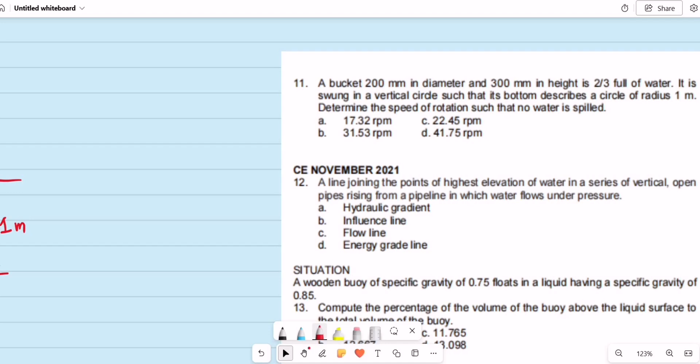Okay, tuloy natin sa number 11. So sabi dito, a bucket 200 millimeter in diameter and 300 millimeters in height is 2/3 full of water. It is swung in a vertical circle such that its bottom describes a circle of radius 1 meter. Determine the speed of rotation such that no water is spilled.

So parang ito yung figure natin. Itatali natin yung bucket, then i-rotate natin siya on a vertical circle. Ang tanong is, ano yung rotation? Basically, that is the angular velocity para walang matapon na tubig.

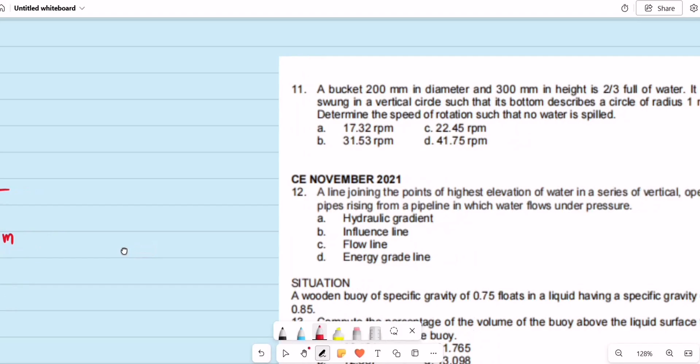Pero take note, nakalagay sa problem na yung laman niya is only 2/3 full of water. So kung i-compute na natin yon, 2/3 of 300 is, ang laman lang niya na tubig ay 200 millimeters, or basically equal to 0.2 meter.

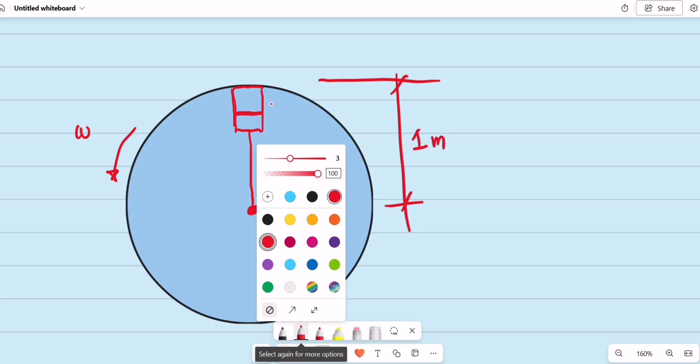So yung radius outside, yung circle na form natin, is 1 meter. Yung laman niya na tubig is only at 200 mm, or basically again that is 0.2 meter.

So parang ganito pala yung appearance nung tubig kapag yung ating bucket ay nasa ibabaw ng ating vertical circle. So ano ba yung mga forces na i-consider natin dito? Kumbaga sa point na to, yung highest point ng ating vertical circle, dito yung parang may pinakamataas na chance na may matatapon na tubig. Ano yung mga forces involved is obviously yung weight ng liquid.

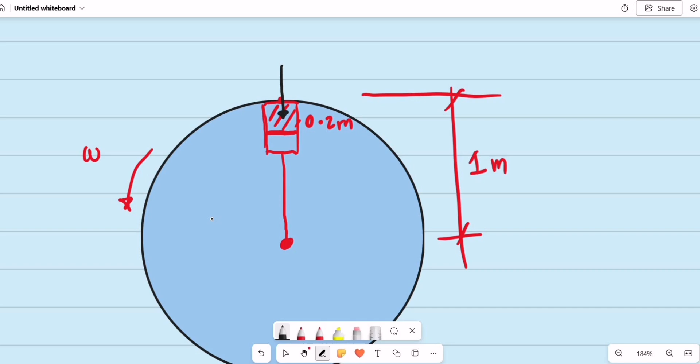At ano yung kukontra doon para hindi siya matapon? Basically, circular motion, pipigilan siya ng centrifugal force. Pero again, we have the water is only 0.2, outside radius natin is 1 meter. Pero dapat yung centroid ng tubig yung i-consider natin to form that circle.

So saan siya dapat? Dapat somewhere dito sa gitna. So basically, magbabawas tayo. Ayan, from 1 meter, from 0.2, bawasan natin ng kalahati. So ang kalahati niya is 0.1 meter. So nandun yung centroid ng tubig.

So ano yung distance na ngayon from the centroid of the water papunta dito sa center ng ating circular motion? What is 1 minus 0.1? Ang i-consider natin na radius hanggang sa centroid ng tubig is 0.90 meter. Basically, again, yun yung 1 meter minus kalahati ng height ng tubig. So we have 0.90 meter.

Ayan, balik tayo sa konting mechanics. Paanong walang tubig ang matatapon? Summation of forces vertical equal to 0. This is upward forces to be positive. So ano yung upward? We have centrifugal force equal to the weight. Yun yung pipigilan niya, yung pagbagsak ng tubig out of the bucket.

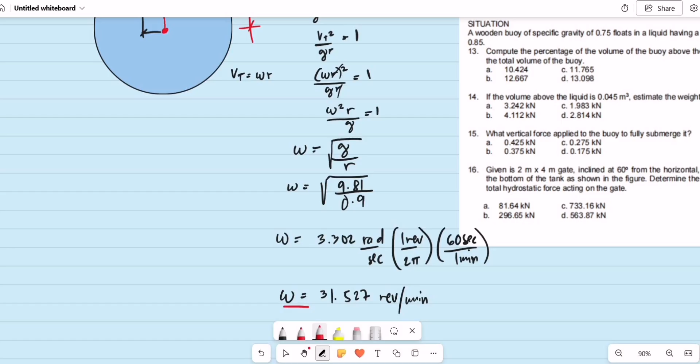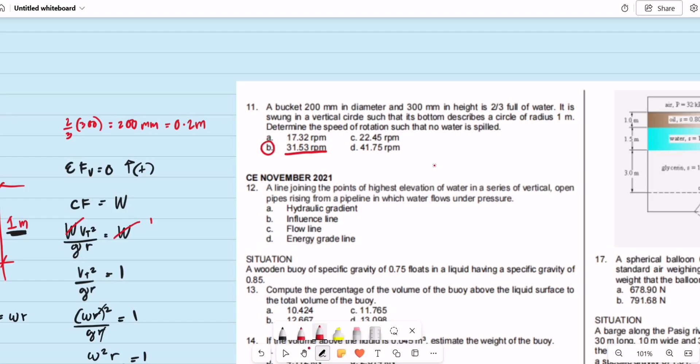So tingnan natin if we have this one sa choices for item number 11. Okay, yun ka C, letter B. We have that as 31.53 revolutions per minute or the RPM.

Okay, next, diretso natin ito sa number 12 since nakaano lang naman siya. Definition of terms. Sabi dito, number 12: a line joining the points of the highest elevation of water in a series of vertical open pipes rising from a pipeline in which water flows under pressure.

So naalala ko lang ito dun sa laboratory experiment sa hydraulics. Meron tayong mga pipe, then meron tayong mga vertical pipes, dito sa horizontal pipe natin.

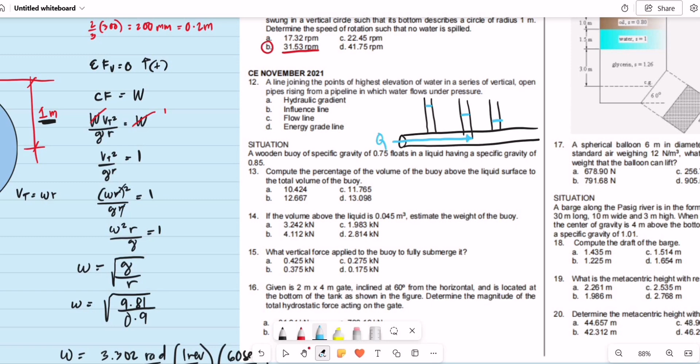At i-allow natin yung fluid flow, pressurize, so tumataas yung mga liquid surface natin sa mga vertical pipes natin. I hope na nagawa natin ito before sa hydraulics lab. Pwede nating i-connect yung top of each liquid surface sa mga vertical pipes, so ang tawag natin dito or sa line na to is the hydraulic grade line, okay, or that is the same as the hydraulic gradient. So letter A tayo for item number 12. Yun yung solution natin for item number 11 and 12.

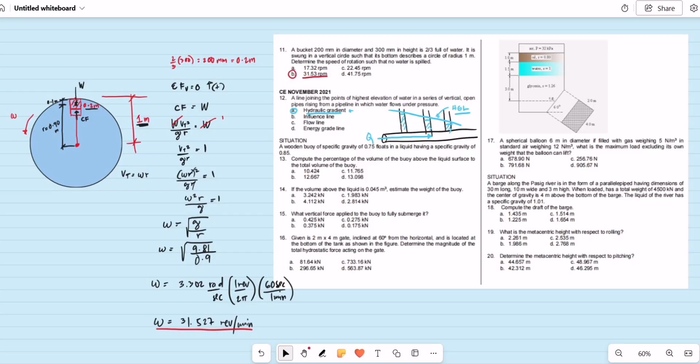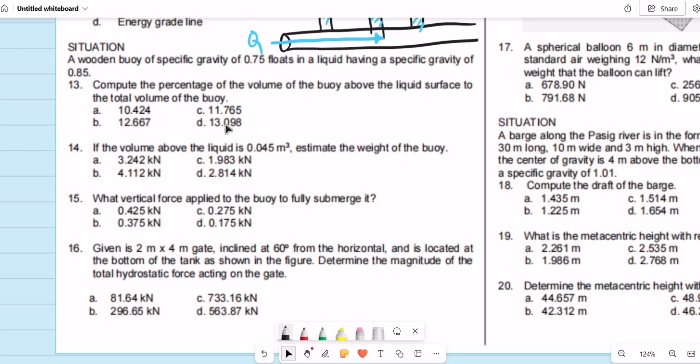Okay, so we continue to item number 13 to 15. Sabi dito, a wooden buoy of specific gravity of 0.75 in a liquid having a specific gravity of 0.85. Question number 13, compute the percentage of the volume of the buoy above the liquid surface to the total volume of the buoy. So parang ito yung ating figure: the object has specific gravity 0.75, specific gravity of the liquid is 0.85.

Kapag nakalimutan lang natin yung basic nito, start with mechanics. Meron tayong weight of the object. Since yung specific gravity ng object ay less than sa specific gravity ng liquid, obviously it will float. Ito yung case number 1 natin ng regular review, so yung weight ay kayang-kayang buhatin ng buoyant force. Paano natin kinukuha yung weight? Weight is simply the gamma of the object times the volume. Buoyant force naman is the gamma liquid times the volume submerged, since partially submerged lang siya.

So we do mechanics, summation of forces vertical equal to 0, upward forces to be positive. Dalawang forces lang naman yan, so yung ating buoyant force is simply equal to the weight of the object. Then we substitute yung mga equivalents.

Buoyant force is simply unit weight of the liquid times the volume submerged, equal sa weight ng object na gamma of the object multiplied by the volume of the object. Kapag i-substitute natin, specific gravity of the liquid times unit weight of water times volume submerged equals specific gravity ng object times gamma water times volume of the object. So ano yung pwede nating i-cancel dito? Yung gamma water.

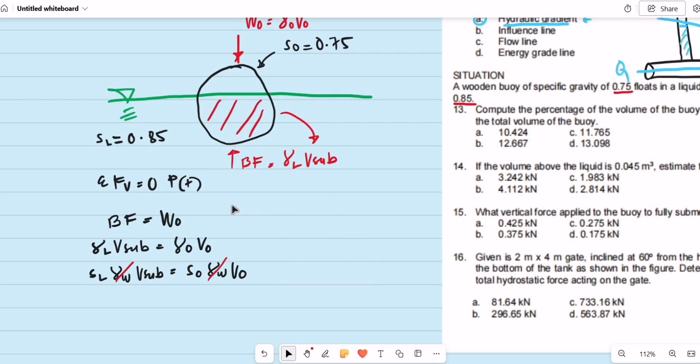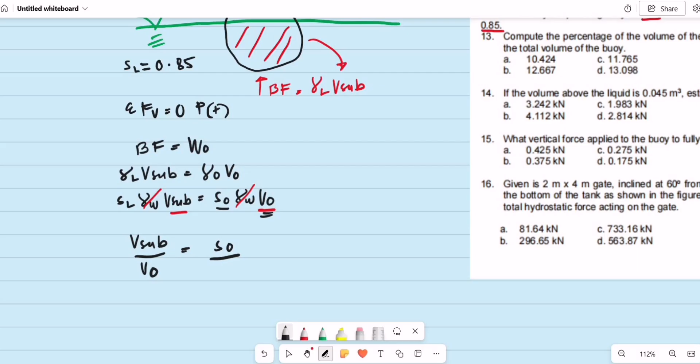Kaya lang sa number 13 kasi hindi ito yung required. Pero kung gusto nating directly makuha yung ratio ng volume submerged to the volume of the object, simply yan yung ratio of the specific gravities. So we have volume submerged divided by V sub O is simply equal to S sub O, specific gravity ng object, divided by the specific gravity of the liquid. Pero paano naman yung required sa number 13? Kasi ang hinahanap ay the volume above the liquid surface.

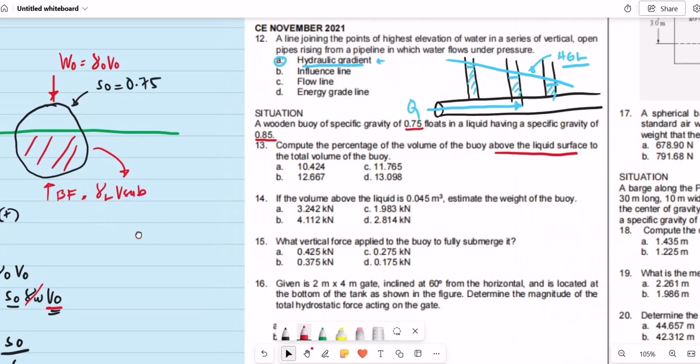So below the liquid surface, we have the volume submerged, at ilagay natin itong volume above the liquid ay the volume unsubmerged. Paano natin kukunin yun? Balikan lang natin yung basic when it comes to the volume of a floating body: yung volume na hindi nakalubog plus yung volume na nakalubog is simply the total volume of the object.

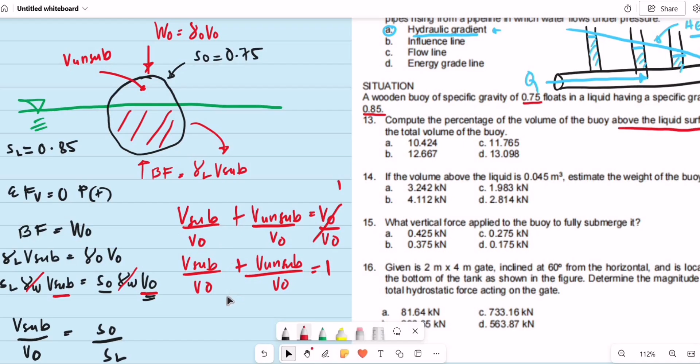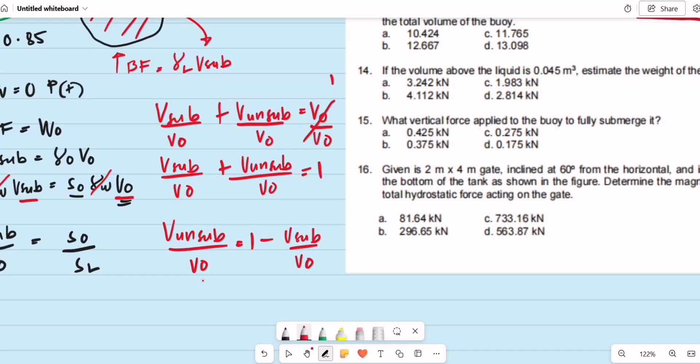Ang ginawa lang dito, since fraction or percentage yung hinahanap, divide all terms by the volume of the object. So alam natin this will simply be 1: volume submerged divided by volume of object plus volume unsubmerged divided by volume of object is simply equal to 1. Kung i-transpose natin yan, we have the volume unsubmerged divided by the volume of the object is simply equal to 1 minus volume submerged divided by the volume of the object.

Pero di ba meron na tayong equivalent when it comes to specific gravities? So we have the volume unsubmerged to the volume of the object is simply equal to 1 minus the specific gravity of the object divided by the specific gravity of the liquid. Pwedeng yun na lang yung gamitin natin sa item number 13. So we have volume unsubmerged divided by volume of the object equals 1 minus SO over SL. Ano yung SO natin? 0.75 divided by specific gravity ng liquid na 0.85. So this should be equal to 1 minus 0.75 divided by 0.85.

Times 100 na lang. I think yung nasa choices ay nasa percent. So pag 3 decimal places, we have that as 11.765%. So ito yung ratio ng volume unsubmerged to the total volume of the object.

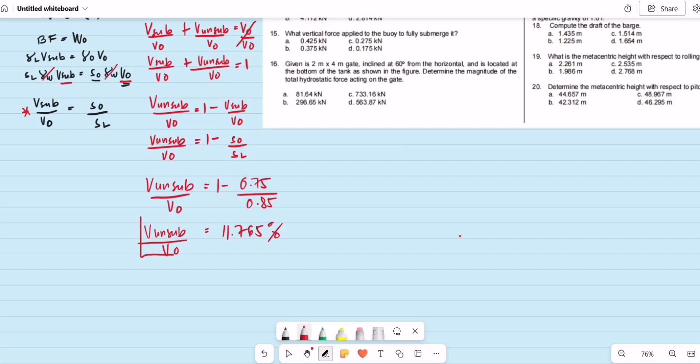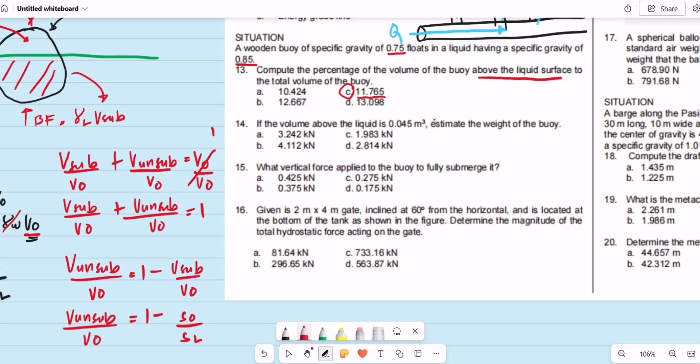So check natin for item number 13. Okay, so that will be letter C. Pwede nyo i-memorize na lang yung equivalence nito. Kung gusto ninyo, V sub over V O is simply SO over SL. Yung nasa ibabaw ng liquid, V unsub over V O is simply 1 minus SO over SL, kung ang gagamitin lang natin ay mga specific gravity.

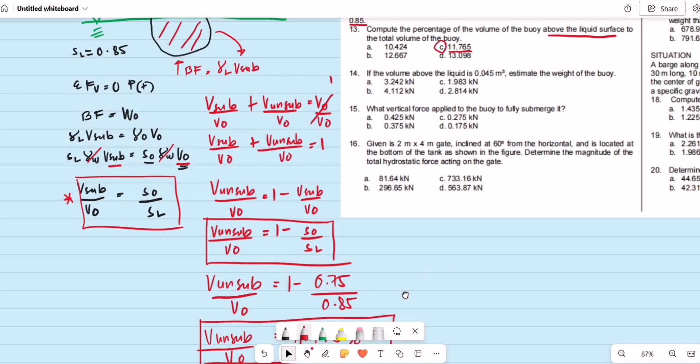Follow-up question number 14: If the volume above the liquid is 0.045 cubic meter, estimate the weight of the buoy. So, volume above the liquid. Dito tayo sa number 14. Volume above the liquid is a volume unsubmerged, which is equal to 0.045 cubic meter. Okay, yun yung given sa number 14.

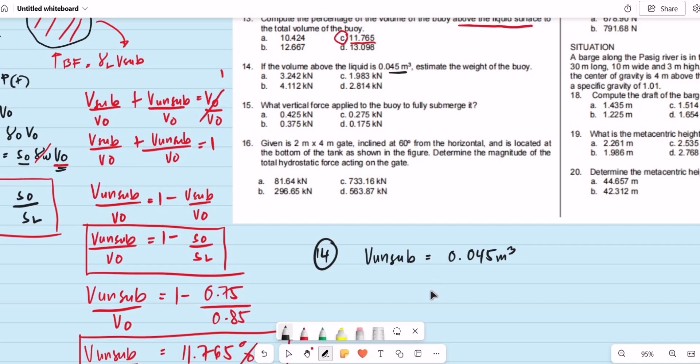Pero, di ba meron tayong percentage? Yung kaka-compute lang natin sa item number 13. So, we have that as volume unsubmerged to the total volume of the object is equal to in percent or in decimal, divided by 100, 0.11765, or again yun yung 11.765%. So we can have the volume of the object.

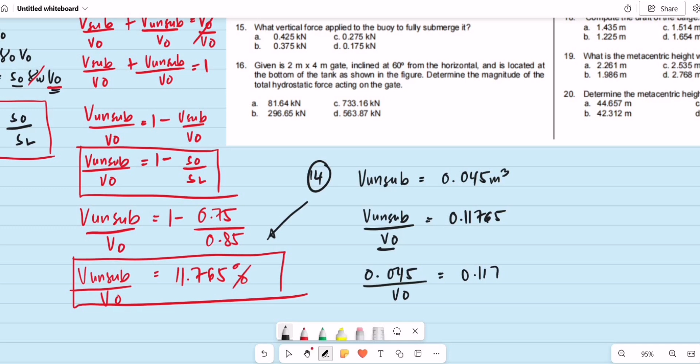Volume unsub is 0.045, divided by the volume of the object is equal to 0.11765. So compute natin yung volume ng object. So the volume of the object should be equal to 0.045 divided by 0.11765.

Okay, total volume na ito class ng object. So gawin nating 4 decimal siguro. 0.3825. Tama ba? Kung ganun yung rounding natin, 0.3825. Okay, so pwede yan. This is now the total volume of the object, in terms of cubic meter.

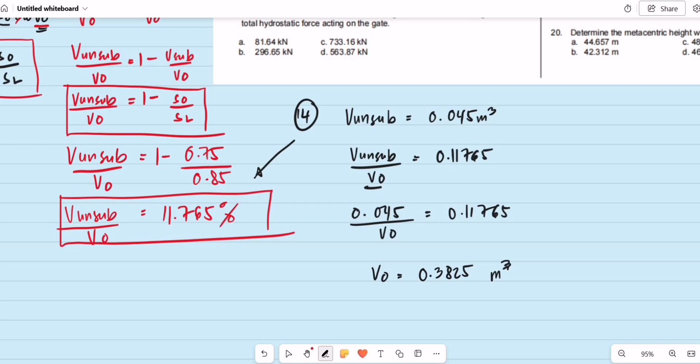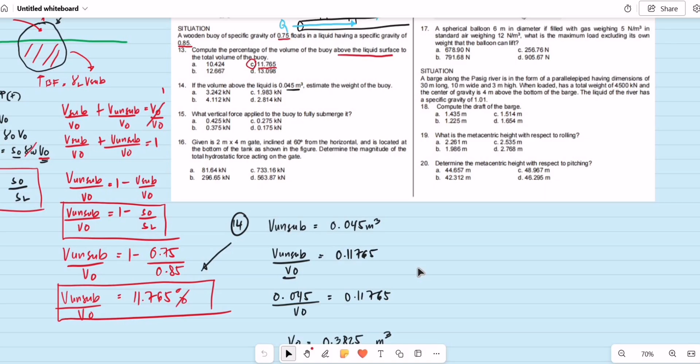Okay, so ngayon meron na tayong volume ng object. Paano natin hahanapin yung weight of the buoy? Di ba kanina, meron tayong equation. We have the weight of the object is simply gamma times volume. So, the weight of the object is equal to gamma ng object; specific gravity niya is 0.75 times gamma water, 9.81.

At yung na-compute natin na volume, we have the 0.3825 cubic meter. So, ito yung record sa item number 14, the weight of the object. Pwede natin i-direct yung stored value times 0.75 times the 9.81. Equal to? We have 2.814 kilonewtons.

2.814, okay, kilonewtons. So check natin if we have this one sa choices. Okay, meron? Yeah, so we have that as letter D, 2.814 kilonewtons. And then lastly, item number 15: What vertical force applied to the buoy to fully submerge it.

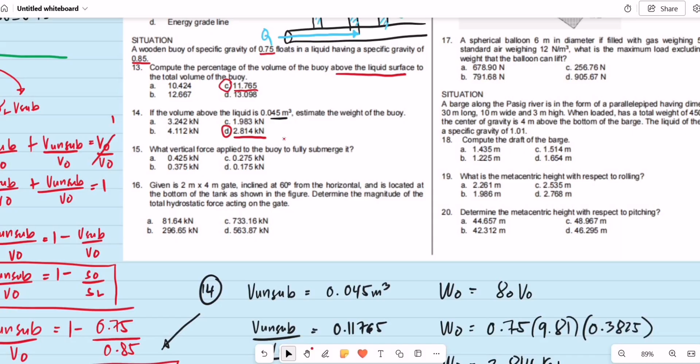So, ano yung additional force? Diba, obviously, it is just partially submerged. Kailangan nating magdagdag ng additional force para lumubog siya. Pero ano lang ba yung portion na hindi nakalubog? Given yun sa item number 14 kanina. So sa item number 14, that volume above the liquid surface is 0.045 cubic meter. So yun lang siguro yung kailangan nating kunan ng equivalent doon sa buoyant force.

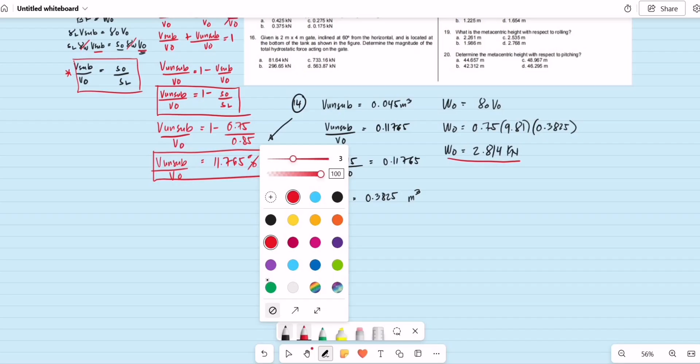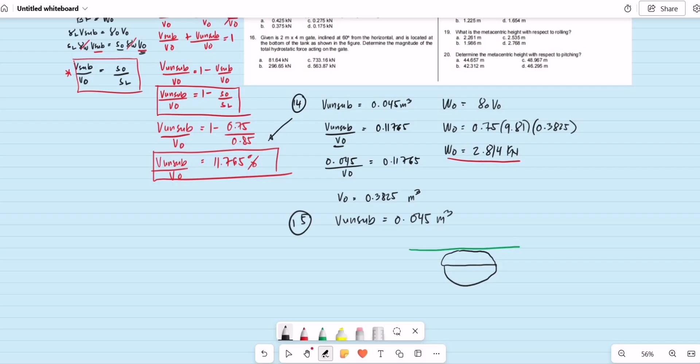So pwede yung ganun na shortcut. Dun sa item number 15, meron tayong given kanina na volume unsubmerged is equal to 0.045 cubic meter. Kindly imagine lang, 'di ba, yun lang yung additional portion ng object na ilulubog natin. Sabihin natin, ito yung portion na yon. Initially, ito lang yung volume submerged.

Again, initially kanina, ito yung volume unsubmerged equal to 0.045 cubic meter. So, yan lang yung dadagdagan natin ng equivalent buoyant force, na equivalent nung idadagdag natin na additional force. So, that is simply equal to the gamma liquid times the volume unsubmerged. So, try natin yung method na to.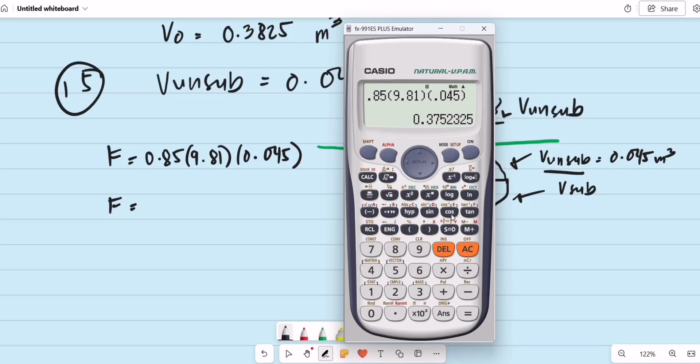Kasi again, yung additional force, ang equivalent niya is the gamma liquid times yung ilulubog mo, which is the volume unsubmerged. So, that additional force should be equal to gamma liquid, 0.85 times the 9.81, multiplied by 0.045 cubic meter. So this magnitude should be equal to, ayan, so we have 0.85 multiplied by the 9.81, multiplied by 0.045. So we have 0.375 kilonewton.

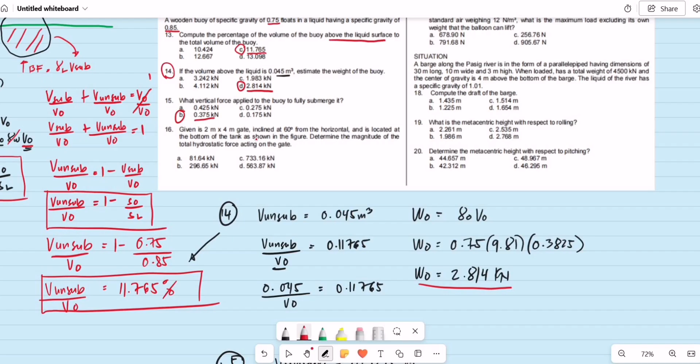0.375, okay, kilonewton. So check natin if we have this one sa choices, item number 15. Okay, so that will be letter B tayo, 0.375 kilonewtons. So ito yung solution natin for item 13 to 15.

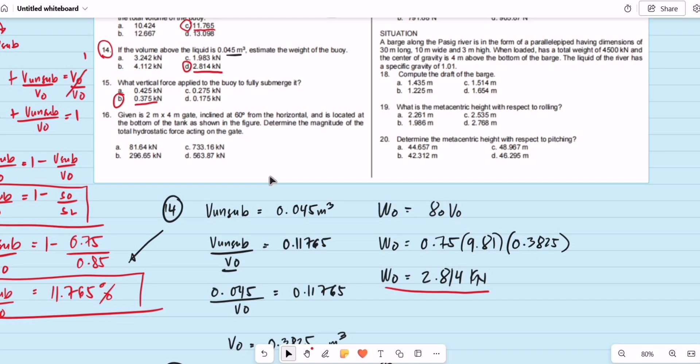Okay, so proceed na tayo ngayon sa item number 16. So sabi dito, given is a 2 meters by 4 meters gate inclined at 60 degrees from the horizontal and is located at the bottom of the tank as shown in the figure. Determine the magnitude of the total hydrostatic force acting on the gate. So ito yung figure natin.

We have ayun, 3 layers of liquid or liquids. So meron tayong oil, we have water, and then glycerin. So sa ibabaw niya, pressurized pa ng hangin, that is 32 kilopascals. So tinatanong lang yung total hydrostatic force acting on this inclined gate. Again, so that should be on the center of pressure.

So kapag naka-incline siya, class, how do we compute for the hydrostatic force? We can have it as gamma h bar times the area. Kaya lang, wala tayong equivalent ng h bar kapag yung surface is naka-incline, at the same time kapag multiple layers of liquid naman. Usually ginagamit lang natin ito kapag isang liquid lang, at dapat yung liquid surface niya is zero pressure. Kung multiple layers tayo, ang ginagawa natin, ang force is equal to pressure up to the center of gravity multiplied by the area. Kung napakaraming pressure, summation of pressures lang natin hanggang center of gravity, then multiplied by the area, that will be the total hydrostatic force.

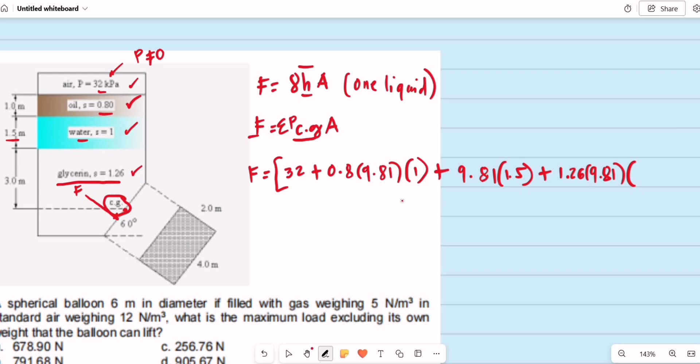Last layer tayo, we have the glycerin. Specific gravity is 1.26 times 9.81. Ang kailangan lang natin is yung location ng center of gravity. Nakabigay naman siya exactly 3 meters galing dun sa interface with water. So that should be the height of the glycerin hanggang center of gravity lang, 3 meters.

Ayan, summation of all pressures hanggang center of gravity - 32, yung oil, yung tubig, and then glycerin. Kapag nandun na tayo sa center of gravity, i-multiply na natin yon sa area ng gate. The area of the gate is 2 meters by 4 meters. This will be the total hydrostatic force, or the total force acting on the gate.

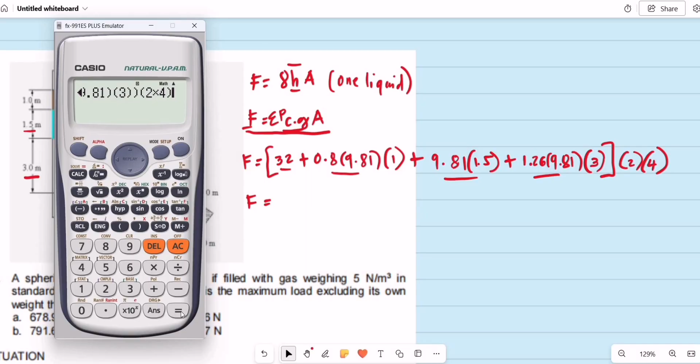So if you are to solve for that one, we have 32 plus 0.8 of the 9.81, 1 meter lang yan. Plus tubig, that is 9.81, height ng tubig is 1.5. Plus glycerin, specific gravity 1.26 times 9.81, height ng glycerin hanggang center of gravity is 3. Multiplied by the area, we have that as 2 by 4, equal to 733.158 kilonewtons. So let's say 733.158 kilonewtons.

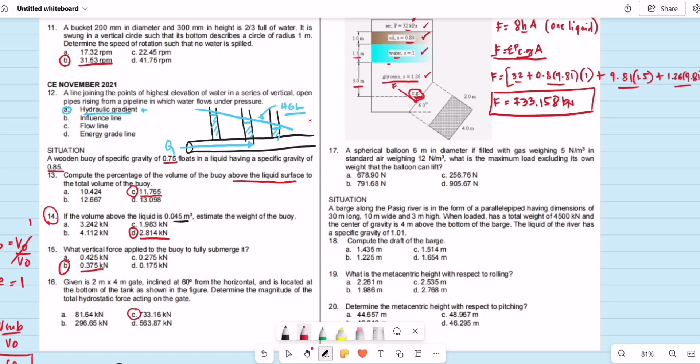And so check, 733.158. So check natin yan sa choices. Okay, therefore for item number 16, we have that as 733.16. So that will be letter C tayo dun.

Okay, proceed tayo sa item number 17. So sabi dito, a spherical balloon of 6 meters in diameter filled with gas weighing 5 newtons per cubic meter in standard air weighing 12 newtons per cubic meter. What is the maximum load excluding its own weight that the balloon can lift?

So let's say ito yung balloon natin, meron siyang laman na gas. Ang unit weight ng gas sa loob ng balloon is equal to 5 newtons per cubic meter. Tapos yung air outside the balloon, gamma air natin is equal to 12 newtons per cubic meter. So syempre, mas magaan yung hangin sa loob, so most likely lilipad dapat itong balloon. So ano yung additional weight daw? Sabihin natin W na pwedeng buhatin ng balloon. Para siyang buoyancy pero hangin yung usapan.

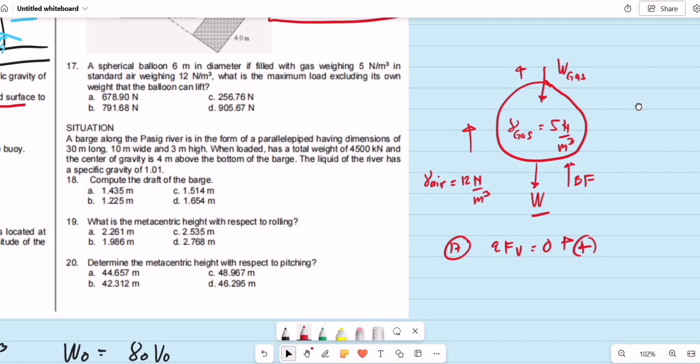So summation forces vertical, 'di ba? Meron tayong buoyant force and then yung additional weight, at isama lang natin syempre yung weight ng gas. So number 17, main equation natin, summation of forces vertical equal to 0, upward forces to be positive. Ano yung upward force? Yun yung buoyant force because of the air, minus yung weight ng gas na nasa loob, minus yung additional weight na bubuhatin ng balloon, equal to 0.

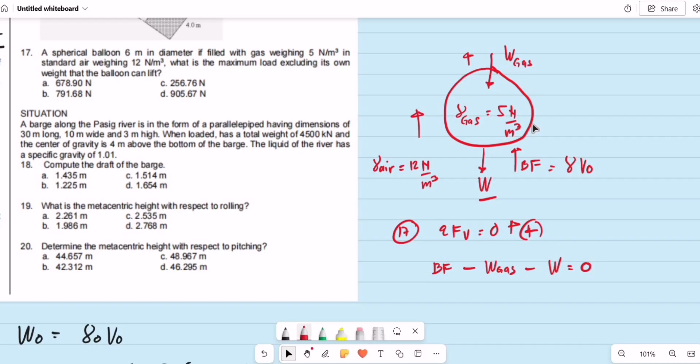Ang equivalent natin dito is para siyang gamma times the volume. I-assume natin na ayun nga yung buong balloon is napalibutan ng hangin. So paano natin i-compute yung weight ng gas? Weight ng gas is basically gamma times the volume. Meron naman tayong gamma ng gas. Yung volume is yung sphere natin, meron tayong diameter na 6 meters, so ang radius ng sphere na to should be 3 meters. Yung volume ng sphere is basically 4 pi divided by 3, radius raised to 3.

And we substitute. So buoyant force natin is gamma of air times the volume. Gamma of air is 12 newtons times volume, 4 pi divided by 3, radius ng sphere is 3 cube, minus yung weight ng gas. Ano yung gamma ng gas? We have 5 newtons per cubic meter. Pareho na lang yun sa volume ng sphere, we have that as 4 pi divided by 3, radius 3 raised to 3, minus the additional load W equal to 0. So what should be left? The value of the W.

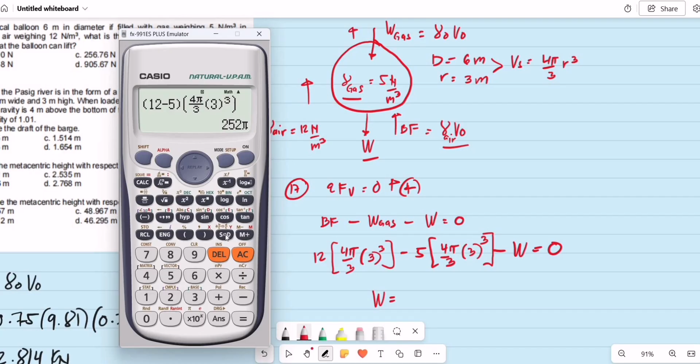Ayan, so pwede natin i-factor out yan. 12 minus 5, multiplied by 4 of shift pi divided by 3. So the radius is 3 cube. So this should be equal to 252 of pi or 791.681.

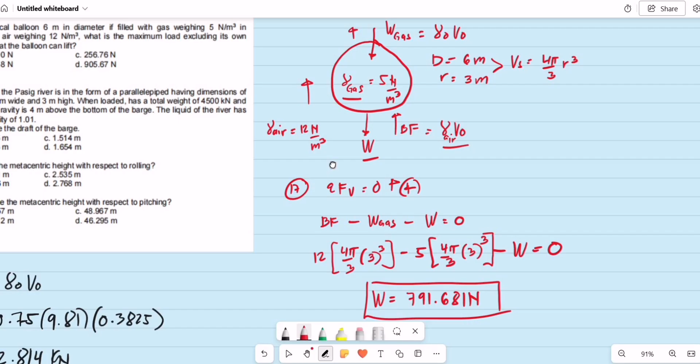791.681 newtons, since lahat naman ng units natin dito nasa newtons. So do we have this one sa choices? Okay, item number 17 is letter B tayo doon, 791.68.

Okay, so before the next problem, intro muna tayo dito sa topic na to.

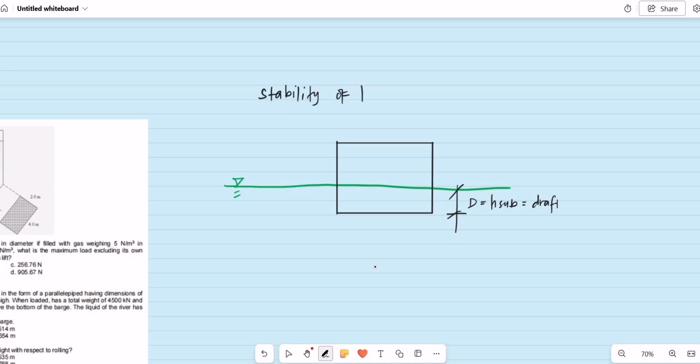Okay, so the next topic is the stability of floating bodies. So pag may nilagay tayo na object sa liquid, for the case ng mga floating bodies, hindi naman talaga sila upright na nakatayo while floating. So paano ba natin didesign na pag naglagay tayo ng object like for example yung bangka or yung barko, pag nilagay natin sa dagat is upright yung kanyang position while floating. Ang concept na pagdidesign nun is the stability of floating bodies.

We need to familiarize some of the points when it comes to this analysis. We have yung point M. Let's say this is point M. So M is simply, sabihin natin M is simply the metacenter.

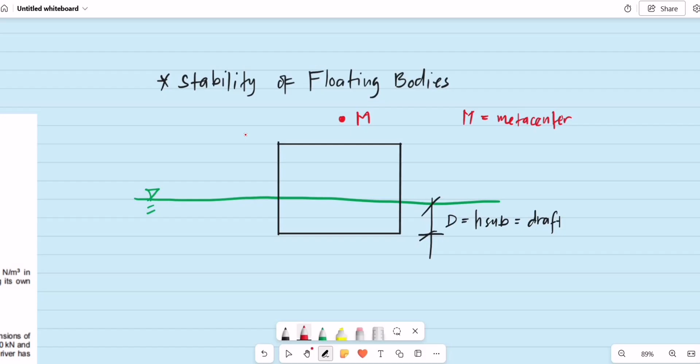M is the metacenter. Then kailangan din nating i-locate yung center of gravity ng object. So ang ginagamit the usual is capital G, this is the center of gravity. Then meron tayong submerged height, yun yung H sub.

Pero ang madalas na ginagamit dito is D, which means draft. So basically yun yung height na nakalubog. Doon sa height na nakalubog is meron tayong tinatawag na center of buoyancy. Ito yung B sub O. So we have B sub O, this is the center of buoyancy. Yan, so that is the center of buoyancy, the B sub O.

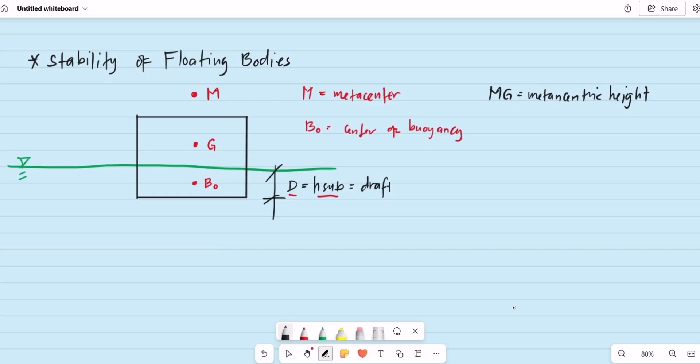So ano yung mga kailangang i-compute dito? When it comes to the stability of floating bodies, ang isa sa mga kino-compute dito is the MG. So MG is basically the metacentric height. Yan, so metacentric height, MG. Kung titingnan lang natin sa ating floating body yung mga points na yon, MG is simply the distance from the metacenter to the center of gravity.

So how do we compute that? Ayan, meron tayong distance pa na kailangang i-consider. Ito yung B sub O. Again, kung babalikan natin, from metacenter to the center of gravity is MG. We have that as G. From the metacenter papuntang center of buoyancy, ano naman yung distance na to? That is simply MB sub O, yun lang naman siya. We have the MB sub O.

So meron tayong formula how to determine yung value ng MB sub O. MB sub O can be computed as, pag rectangular, applicable lang muna ito sa mga rectangular sections. So the equivalent of MB sub O is the b squared divided by 12 times d. So by the way, ano yung b? Ito yung width ng section na kino-consider natin, let's say that is b. So b squared divided by 12d multiplied by 1 plus this is the tangent squared of theta divided by 2.

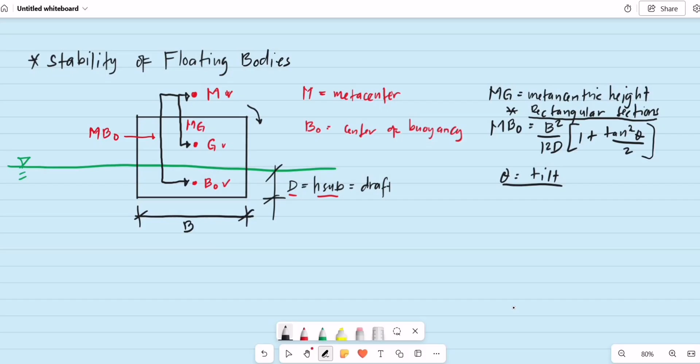So based sa figure natin, balik tayo dito sa figure. Paano natin i-compute yung MG? So the usual, we have the distance MG, this is the metacentric height, is simply the MB sub O, from metacenter to the center of buoyancy, minus may kailangan lang tayong ibawas na distance. Ano yung distance na yun? Ito yung distance from the center of gravity to the center of buoyancy. So from the letter itself, this is G, B sub O, anong ibig sabihin nun? Center of gravity to the center of buoyancy. So we have that as minus the GB sub O. So parang i-observe lang natin, MB sub O minus the GB sub O is MG. So parang ito lang yung ating reference dito sa ating figure.

So pag nagkaroon tayo ng positive na value ng MG, ibig sabihin yung ating floating body, kapag positive yung nakuha natin na MG, ibig sabihin yung floating body is stable. And yun nga, kung nagkaroon naman tayo ng negative na MG, ang ibig sabihin lang nun, the floating body is simply unstable. So bakit meron tayong stable and unstable?

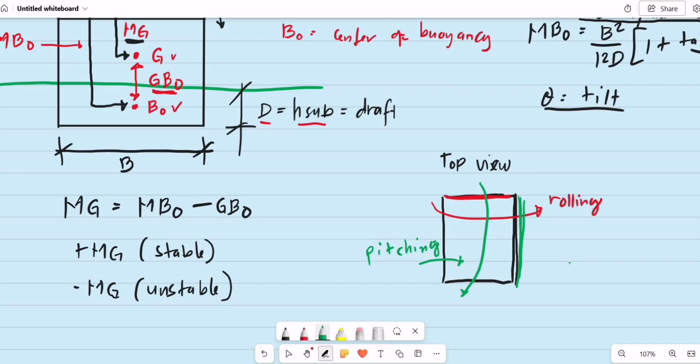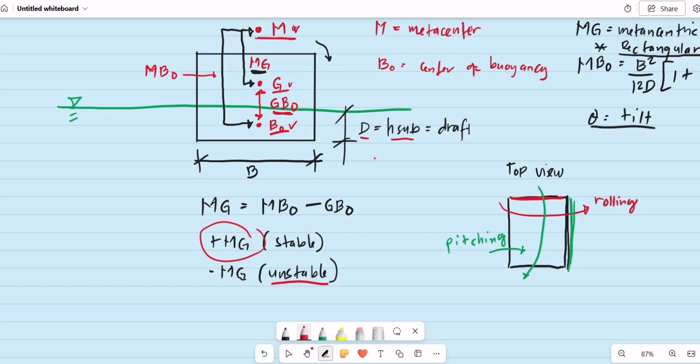Just in case lang na baka ang itanong is definition of term. So in most cases, para maging positive yung value ng metacentric height, in most cases dapat nasa taas ang metacenter. Just in case na yung metacenter is somewhere between yung center of gravity or the center of buoyancy, mataas yung chance na it will be unstable. So dapat yung metacenter nasa taas.

Alright, so let us solve item number 18 to 20. A barge along Pasig River is in the form of a parallelepiped having dimensions of 30 meters long, 10 meters wide, and 3 meters high. When loaded, the total weight is 4,500 kilonewtons and the center of gravity is 4 meters above the bottom of the barge. The liquid of the river has a specific gravity of 1.01.

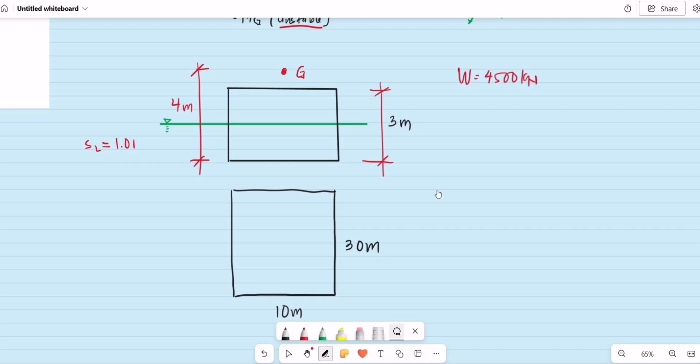So question number 18 is compute the draft of the barge. So parang ito yung figure natin. Siguro medyo nakapagtataka na yung center of gravity is above 3 meters. So sabi naman niya, the barge is loaded, so possible yun yung reason kaya lumipat ng kaunti yung center of gravity.

Ayun. So yung question number 18 is tinatanong yung draft. Yung draft kanina, ito yung D. Pero yun nga, D yung common na ginagamit na term. But basically, that is the height submerged. So ang gagamitin lang natin dito is buoyancy.

So di ba sa buoyancy, okay, we have the weight of the object. Isang buoyant force, bubuhatin siya ng buoyant force. Okay, for question number 18, we do summation of forces vertical equal to 0, upward forces to be positive. So since floating object siya, the magnitude of the buoyant force is simply the weight of the object.

So that is simply, buoyant force natin is the gamma liquid times volume submerged, equal to the weight of the object na given, we have 4,500 kilonewtons. Ay gamma liquid, so take note, ang given na specific gravity, we have that as 1.01. Gamma liquid, 9.81. Then, volume submerged.

Ano yung volume submerged natin? Take note, di ba, pag top view, yan. So, the dimension is 10 meters wide, 30 meters long. So, that is 10 by 30. And then, yung depth na nakalubog is to a height, D sub.

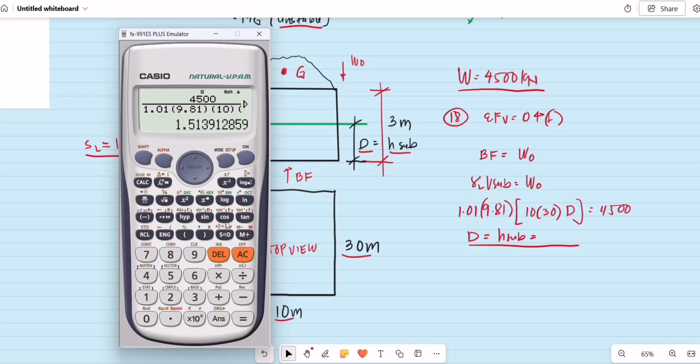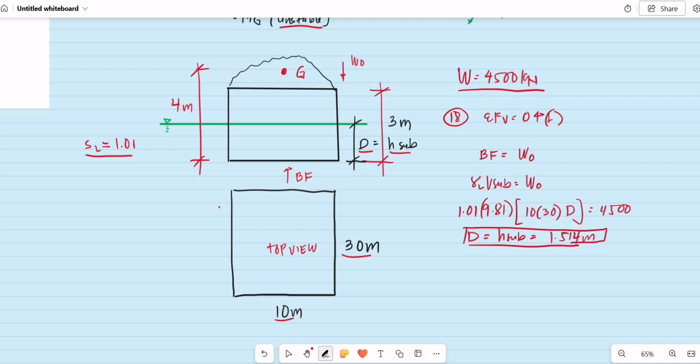Okay, so compute natin, that will be 4,500 divided by 1.01 multiplied by 9.81, times 10 times 30. So we have the draft is equal to 1.5139, gawin natin 1.514 meters. So that will be the draft or the height submerged of the barge.

So kung babalikan natin, item number 18, excuse, that will be letter C, 1.514 meters. So buoyancy lang yung ginamit natin dito.

Question number 19 is, what is the metacentric height with respect to rolling? So ano ulit yung rolling kanina? Kapag yung tilting or movement ng ating barge or ng floating object ay parallel sa shorter dimension, ito yung rolling. So kapag rolling ang usapan, i-consider natin yung parallel dimension natin.

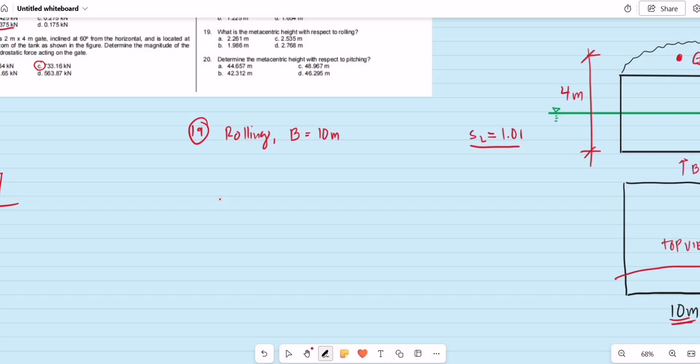Ayan, so this is item number 19. Di ba, ang usapan dito is the rolling. Ang gagamitin natin na value of B is yung weaker axis, that should be 10 meters. Okay? So, wala siyang nabanggit about tilting. Di ba? Walang sinabi sa problem na nag-tilt na yung ating barge. Kapag wala pang given, we can just assume that the theta is simply 0 degree.

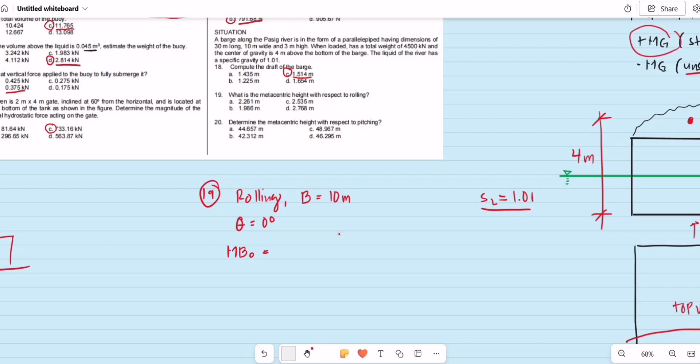So, we can compute first yung isa sa mga distances, MB sub O. Ano ulit yung MB sub O natin? I-assume muna natin for this example na yung ating metacenter ay nasa itaas ng center of gravity. And somewhere dito, yung ating center of buoyancy, that is the B sub O. So, ano yung MB sub O? Formula natin kanina.

This is B squared divided by 12 times the draft, multiplied by 1 plus tangent squared of theta divided by 2. But take note, our tilting is 0. There's no given rotation, and tangent of 0 is simply 0. So since this is 0, what remains is B squared over 12D times 1, which is simply B squared divided by 12 times the draft. Okay, that's it when it comes to 0 tilting.

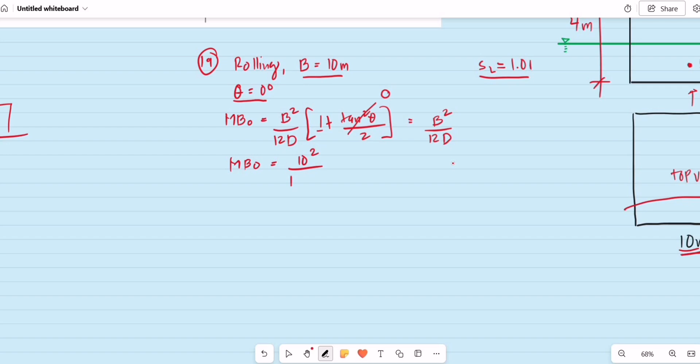Let's compute now the distance from the metacenter to the center of buoyancy. For rolling, our B is 10, the weaker axis. So that's 10 squared divided by 12 times the draft. What was our draft again? The draft is 1.514. So that is 10 squared divided by 12 times 1.514 meters, which equals 5.504 meters.

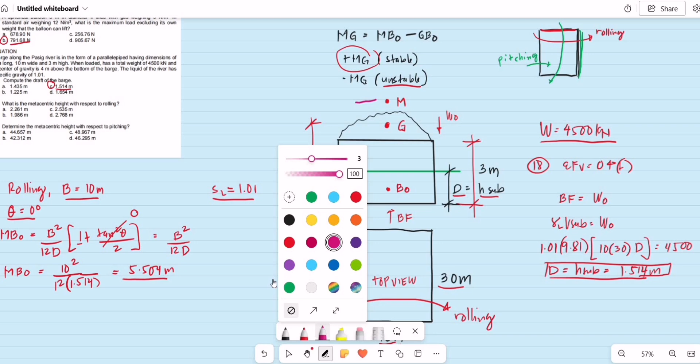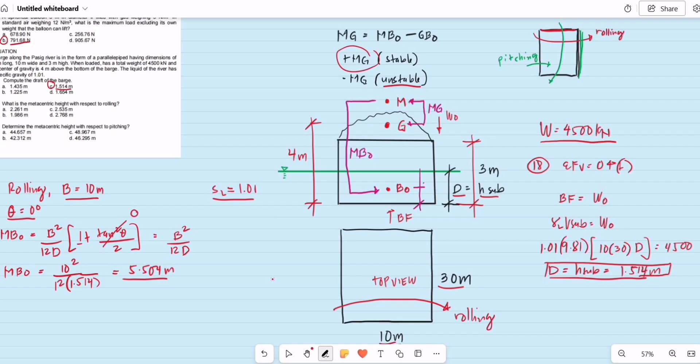Okay, that is the metacentric height or the metacenter, going to the center of buoyancy, which we call MB sub O. So how do we know MG? Again, MG is from the metacenter simply going to the center of gravity. This is our metacentric height, MG. Now for B sub O, it should be at the middle of the draft. So the center of buoyancy is at mid-height of the submerged height. This is the draft divided by 2. So based on our figure, can we now determine the distance from the center of gravity to the center of buoyancy? This is our GB sub O.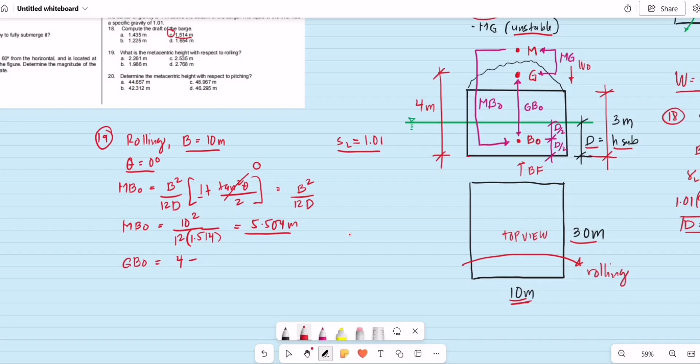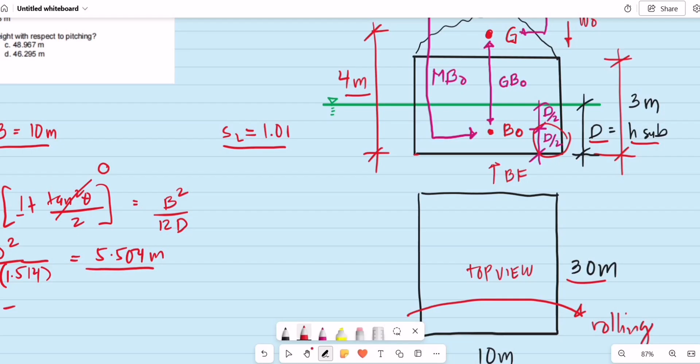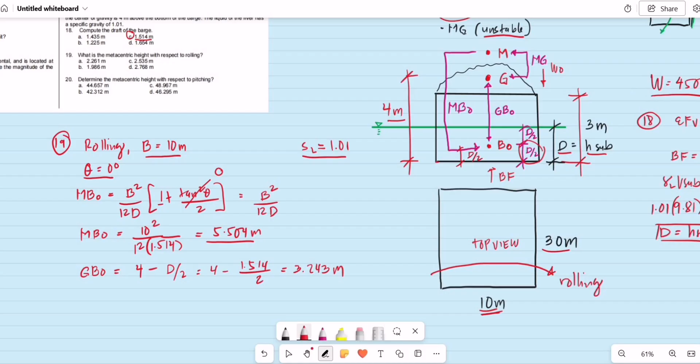Based on the figure, how do we determine GB sub O? Okay, our GB sub O is equal to, according to the problem, from the bottom of the barge going to the center of gravity, we have 4 meters. Minus, let's subtract the D over 2, the draft divided by 2. So that's 4 meters minus 1.514 divided by 2, which equals 3.243 meters. So again, from our figure, that is MB sub O minus GB sub O, which is simply MG.

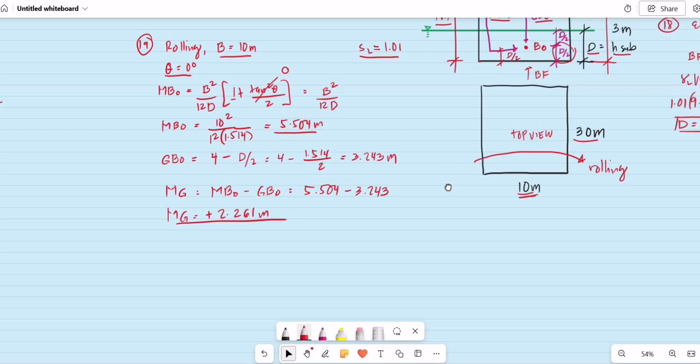So let's compute the metacentric height with respect to rolling. MG is equal to MB sub O minus GB sub O. Our MB sub O is 5.504 meters minus GB sub O which is 3.243 meters. So 5.504 minus that value is 2.261. It's positive, so MG is equal to 2.261 meters. Again, if the value we got is positive, it means it's stable, it is not prone to rolling. Let's check the choices for number 19, 2.261. Okay, so that is letter A.

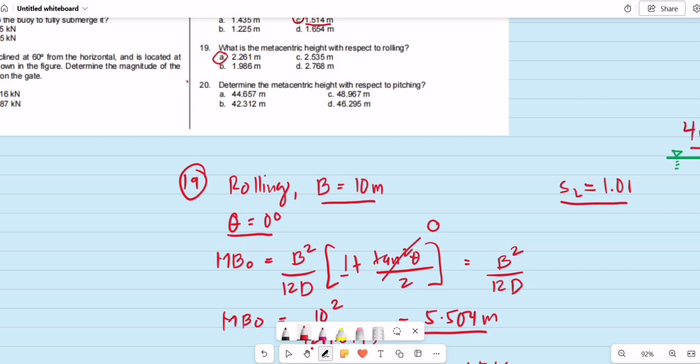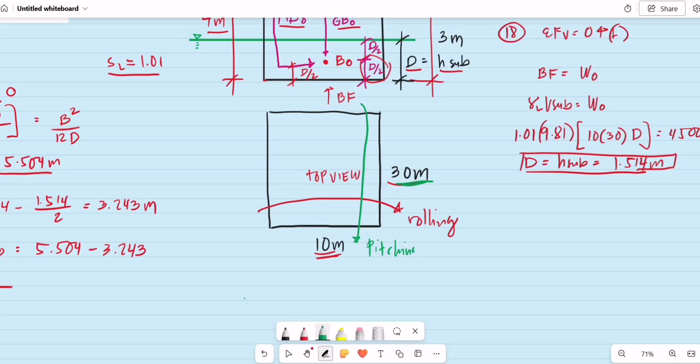2.261 meters. Okay, lastly, number 20, determine the metacentric height with respect to pitching. So when it comes to pitching, the tilting of our object is parallel to our longer axis. So this is the pitching. The question asks for the metacentric height, that's our number 20.

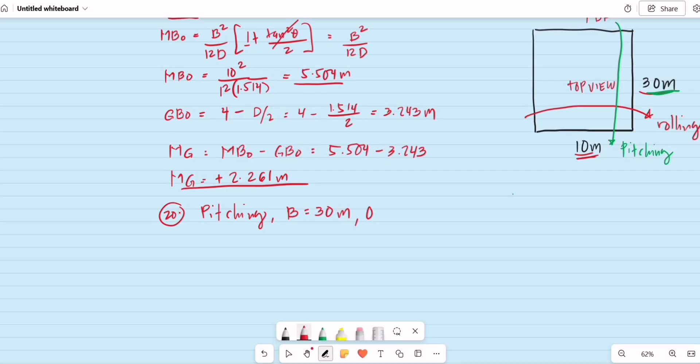So when we're talking about pitching, the capital B we use is the longer axis, the 30 meters. Again, no tilting was mentioned, so theta is still 0 degrees. So when it's 0 degrees, it's the same as our equation earlier in item number 19. The equivalent MB sub O will simply be B squared divided by 12 times the draft. But now our B is 30, though the draft is the same since the submerged height is the same in all directions. So this is 30 squared divided by 12, and our draft is 1.514 meters. So what is the value of MB sub O when it comes to pitching? We have 30 squared divided by 12 times 1.514.

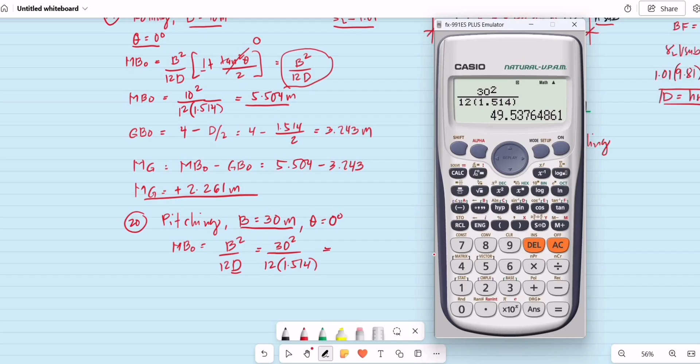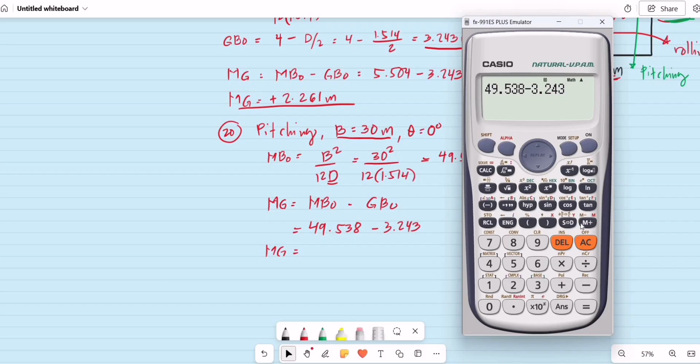So that's 49.538 meters. And GB sub O is the same in all directions, so let's get the equivalent metacentric height when it comes to pitching. MG is equal to MB sub O minus GB sub O. So MB sub O for pitching is 49.538 minus GB sub O which is the same, 3.243 meters. So it will be 49.538 minus 3.243, which is 46.295 meters. And it's still positive, which means it's unlikely to pitch. It is stable.

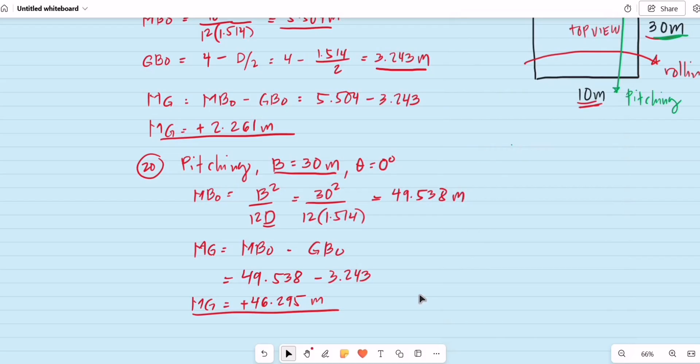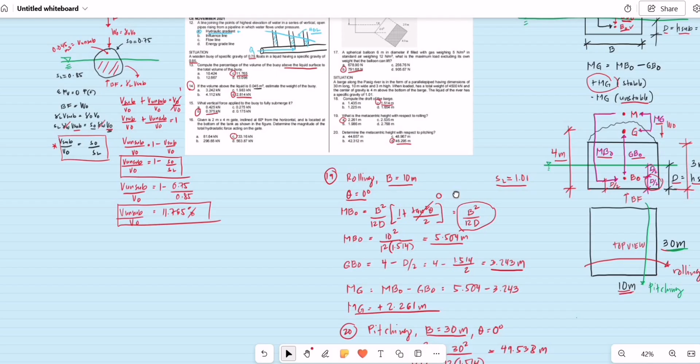So let's check if we have this in the choices, the positive 46 point. Is that right? 46.295. Okay, so for item number 20, that is letter D, 46.295 meters. So this will be our solution for items 18 to 20.